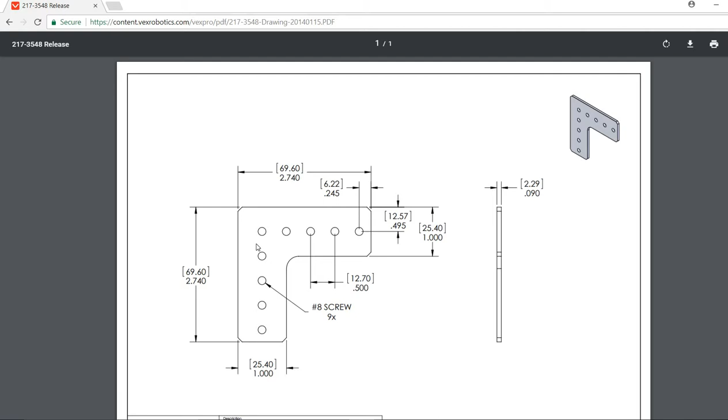I'm going to show you where you can find the robot part that we're going to build. If you go to VexPro's website, www.vexpro.com, go to VersaFrame, Gussets and Mounts, and if we scroll down and then go to the drawing page, we're going to do the 90-degree gusset. Click on this. What I suggest you do is print this page out or put it on a separate monitor, because that's what we're going to be building from.

I'm not going to be flipping back to it all the time, I'm just going to be using the dimensions. There's a few things I'll note: right now this just says number 8 screw, it doesn't really give a size for it. I'm going to use 5/32, I know that's about the size a number 8 screw would use. Also these chamfers, I believe those are going to be probably 1/8 of an inch, what I'll use on that, but it doesn't give a dimension directly on here. So that's what we're going to start from.

We're going to create this. I'll show you at the end of the video that you don't necessarily need to do it for this specific one, but you may want to make your own custom gussets, and going through this exercise will show you how you can do that. I chose this because there's a drawing out there, and it's a relatively simple part that you'll learn a lot from.

So I'm going to go to Creo, and we're going to start a new part. It is a part, and we will name it Gusset, and say OK.

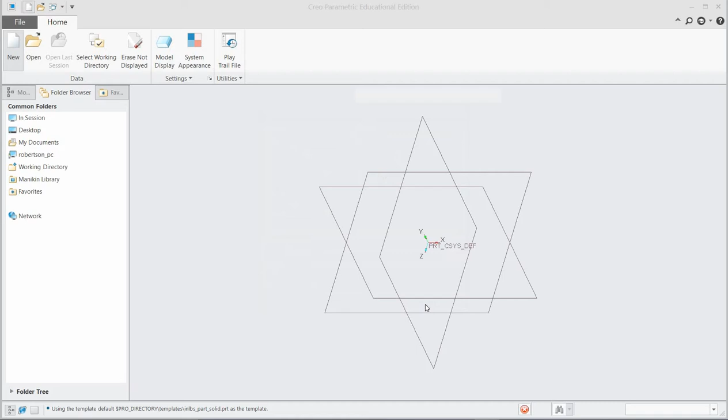So first thing we need to do is start just like we did the previous one. We'll do an extrude, we will select a plane to put it on, and then I'm going to choose to go to the sketch view.

When I like to sketch, if I'm doing a part that takes multiple lines to build, I like to sketch at least one line, and I usually start at the origin or somewhere that makes sense, and I will sketch one line. Right now it's trying to build another line on top of it, it just keeps trying to make a chain. But if you middle click, it just makes that one line.

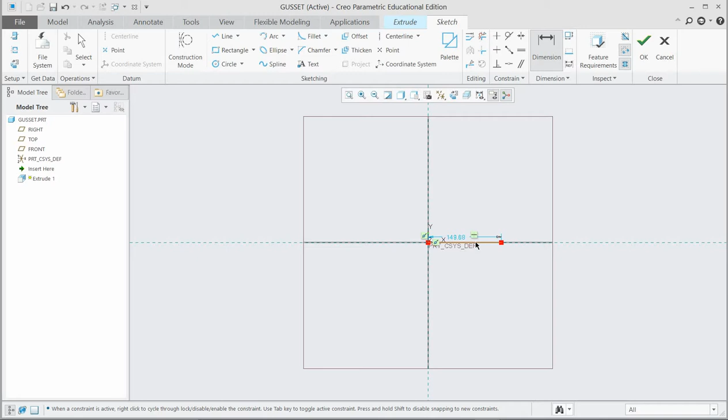I like to go ahead and just make one line and dimension it first. Same way you dimension, just click on it, then come away and middle click. Based on the drawing, this should be 2.740 inches.

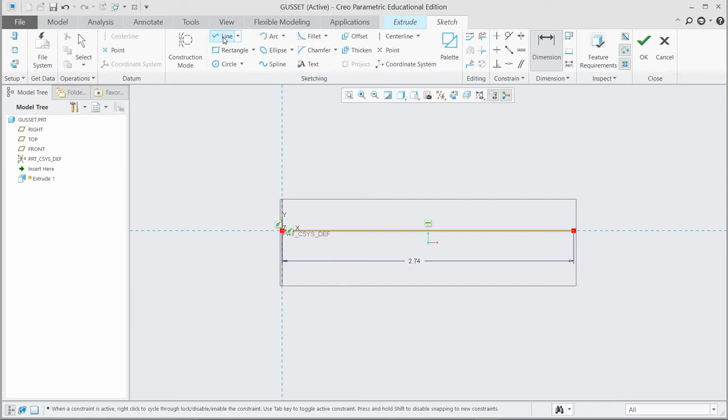After I build one line, the rest of the lines I can go ahead and finish sketching the whole part, relatively close to the size. It doesn't have to be perfect, but it does some neat things.

You'll notice right now this little green symbol says that line's horizontal. If I go off to an angle, it doesn't show it anymore, but if I come close, it tries to snap it, make it horizontal. Also, if I go slowly towards the end of that other line, it tries to make it where it'll connect. You can see the little blue dash line. So it'll help your sketching sometimes.

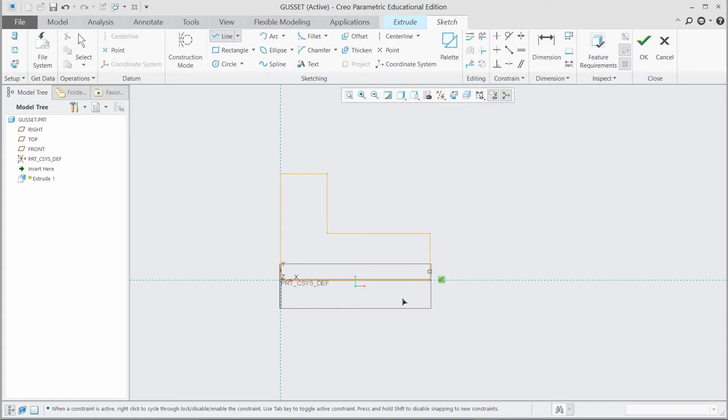Sometimes it'll mess you up a little bit, but I want to go ahead and do that, and then I'll close this sketch. It's still trying to draw, but if I middle click away, it will finish up my sketch. So now I've dimensioned this end here.

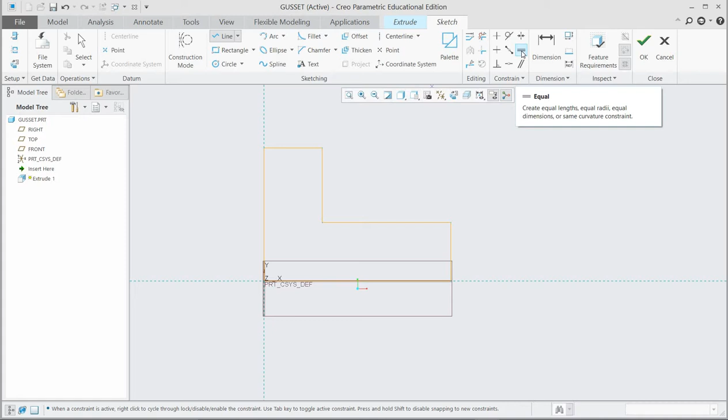I know what it is, but these other lines aren't dimensioned at the moment. But there's some neat things - I know I want this line and this line to be the same length. So what I can do is use this equals constraint right here. These are all different constraints that can be used, and we'll go through quite a few of them in these tutorials, but we'll go ahead and use the equal, where you click on this line. We want this line here to equal this line here. Alright, so it automatically used this 2.74 on this line there.

And there's a couple more that we want equal. We want this line... oh, hold on.

I tried to do too many at once because it's still trying to select those, so I'm going to undo and middle click away so it stops trying to make them all equal. Now I can hit equal again and make that line equal to that line.

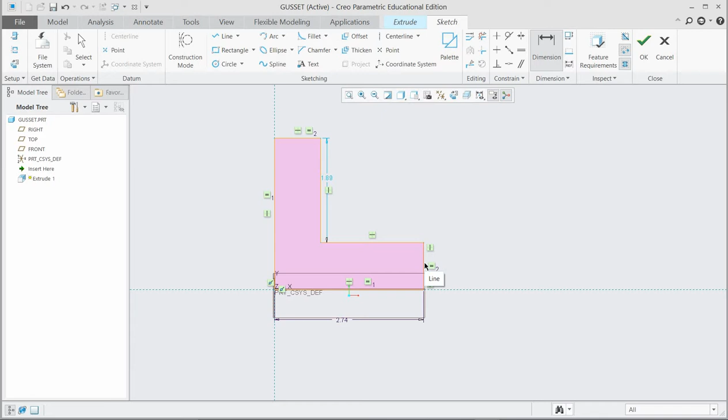Now, to completely lock the sketch down, it only needs one more dimension, but that dimension isn't given in our sketch. So we can put in another dimension, this one right here, which is given in our sketch as a 1-inch line. Now all of these dimensions are black, where before they were blue or green, showing the part wasn't completely constrained.

Now every dimension on this part is filled, and if we tried to put another dimension in here, it would give us an error saying it's over constrained, meaning there's too many things going on. So we'll just undo that—we didn't want to put that dimension in, I was just showing you.

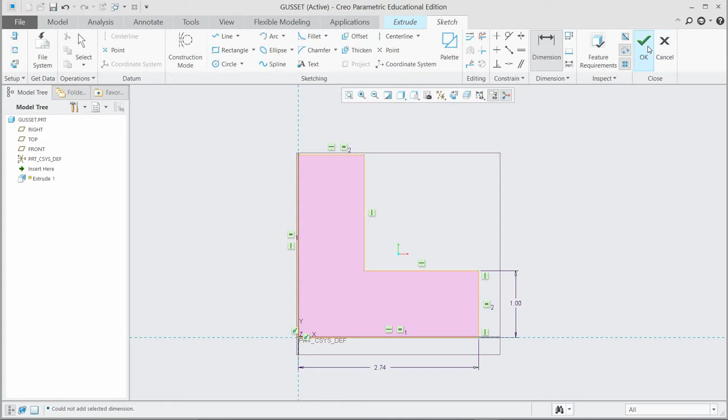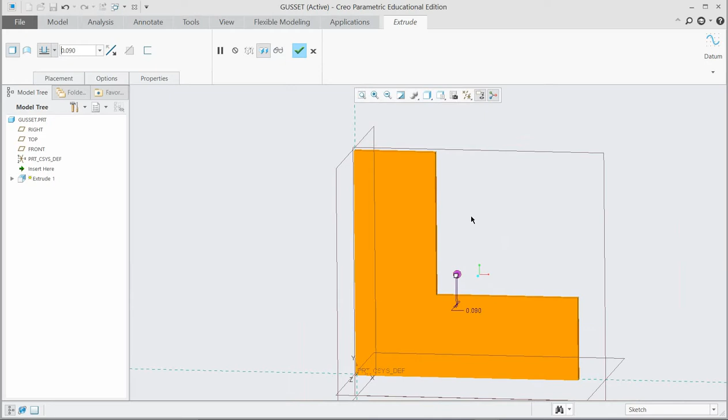So now we've got the basic L shape of our gusset, and if we hit OK, it's going to start extruding the part. If you middle click and drag it around to look at the 3D view, it's trying to pull it way out. But if we go up here and change the depth of the part to 90 thousandths, 0.090, it makes a thin part. And we can hit the check mark.

Alright, it's beginning to look a lot more like the part in the sketch.

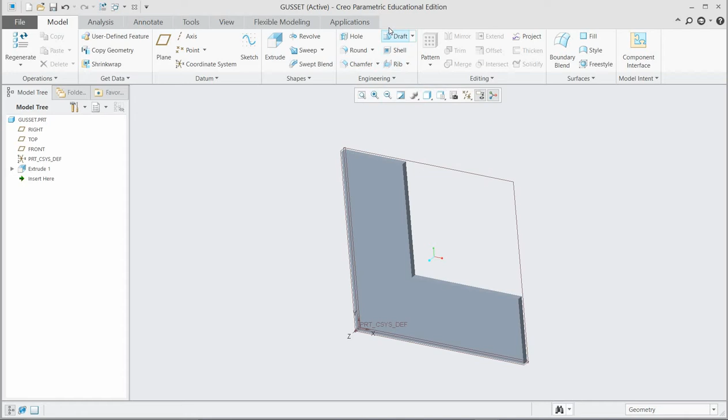So the next thing I'm going to do is add the holes. Holes are something we haven't worked with before, but these are the sub features right here that you can work with—there's this hole tool, and we'll use it.

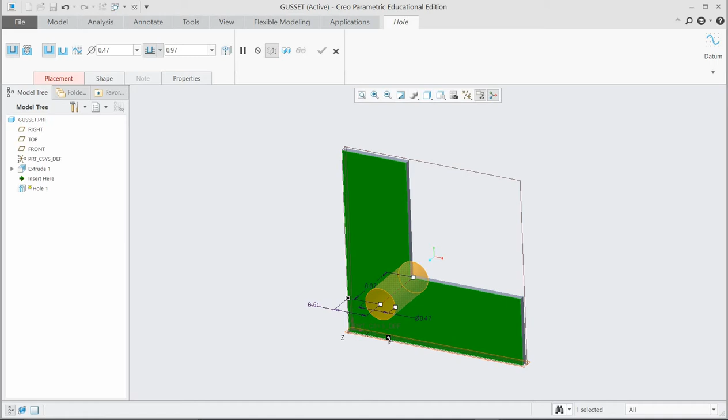We click on the hole, and it's asking where we want to put it. We want it on that surface, and you can see it's trying to show us about where the hole will be. We can use these green little tabs and drag one to this edge because we want to dimension it from that edge—from the bottom edge. Looking at the drawing, it places it right in the middle.

From this outer edge, it's saying it is 0.495. I really figured it would be right at a half inch, but it's showing it's not actually in the center, which is somewhat surprising to me, but that is what it is. So we'll use the dimensions they have on their drawing.

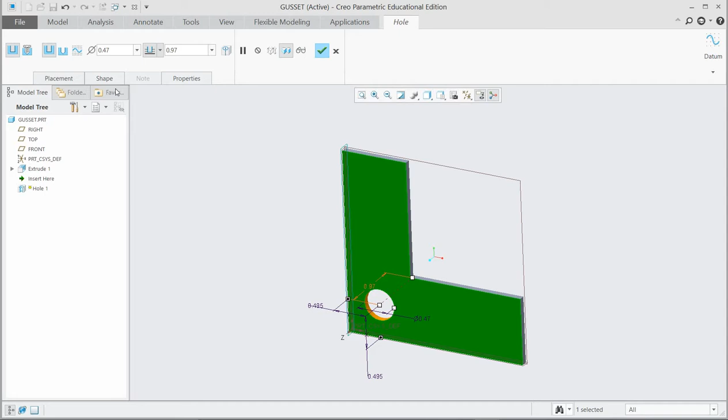Like I said earlier, the diameter is going to be 5/32, and you can go ahead and just type in a math equation. That's one of the neat things about this—you don't have to know it in decimal form.

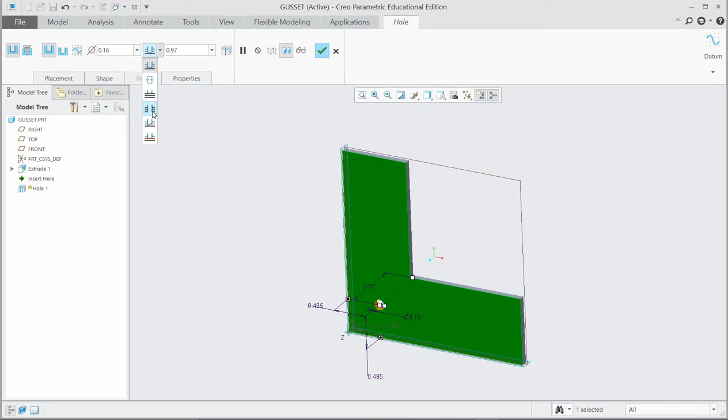And earlier when I talked about putting in the depth of an extrusion or a hole right here, you can also use this drop down to make it go all the way through a part, up to a surface, or other things. I'm going to go up to a surface, around to the back surface, and just let it go all the way to that surface. Then I'll hit check.

So I've made one hole, but if I want to make a pattern of holes, that's essentially what we have here. There's this pattern tool—you can click right there, or you can go to the hole and right click in the model tree, and there's a pattern feature there too. They both do the same thing, just different ways to get to it.

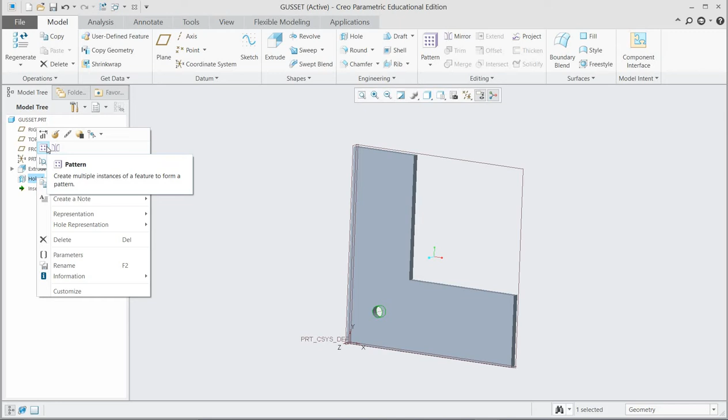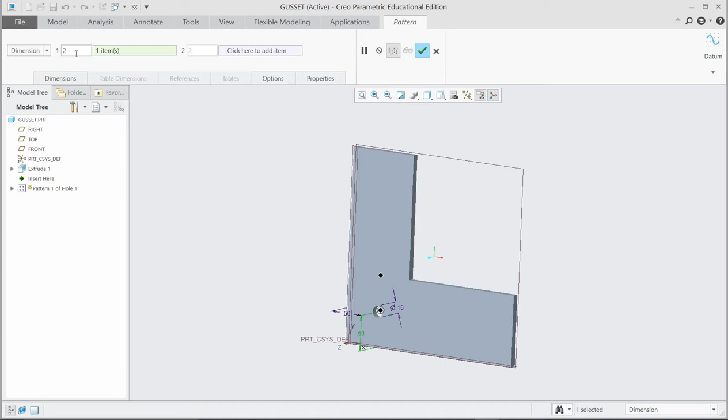Click on it, and now it asks what you want to pattern, or how you want to pattern it. If I click on this dimension here, I say I want to pattern that 0.5, but I want 1, 2, 3, 4, 5 of them, and I say okay—it puts 5 of them in there.

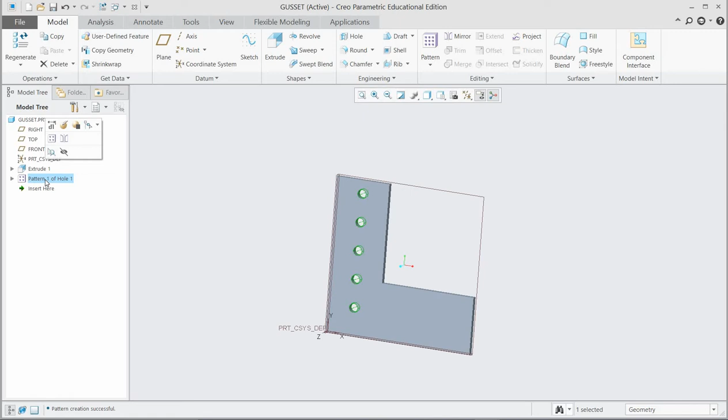Now let's say I want to pattern them going this way as well. What you can do, like I was talking about earlier, is edit the definition of this. We go to dimensions, then in direction 2, click here, add—it's at 0.5, and I want 5 of them.

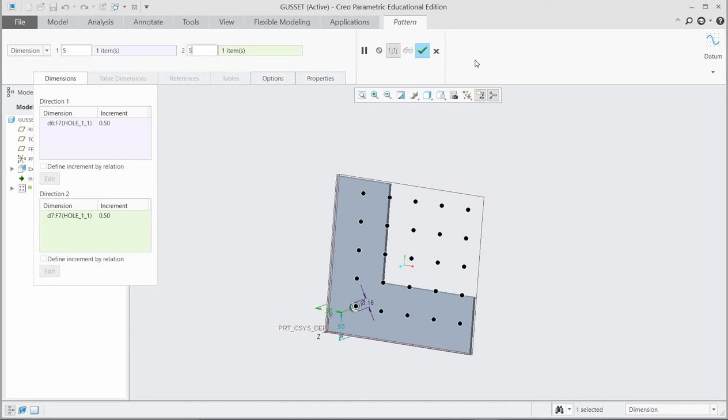You can see we're patterning it this way, but I want to show you what happens if I check this now. It's actually trying to completely fill up this pattern, but there's a way we can turn some of those off. If we go back to edit definition, you can see all these holes it's trying to pattern. If you click on the ones you don't want to actually pattern, they'll turn white. So just go and click them off, and it'll only do the ones that are left black.

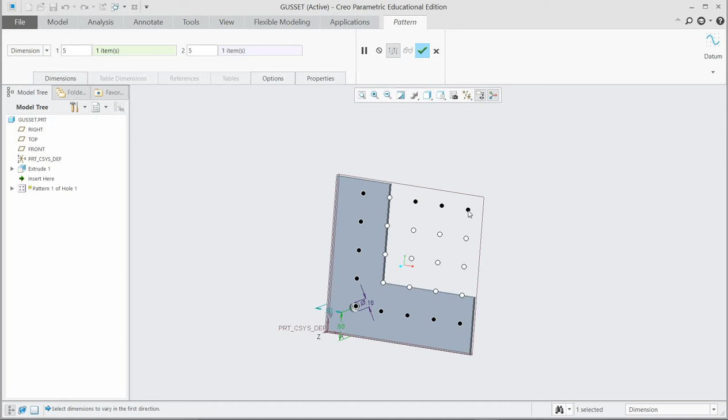So we're turning off features we don't want to go in through our pattern. Alright, so now we've got the whole pattern that we want. Basically the only features we don't have are the fillets on the edge and the chamfers.

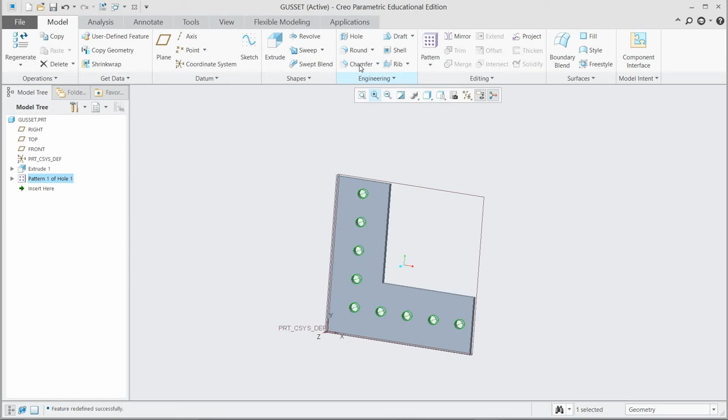What we can do is put a chamfer on this edge. So we click the subfeature chamfer, and then click the edges we want to add it. And I believe I said 1/8 of an inch. Well, that might be a little bit big compared to the drawing, but it doesn't really matter too much.

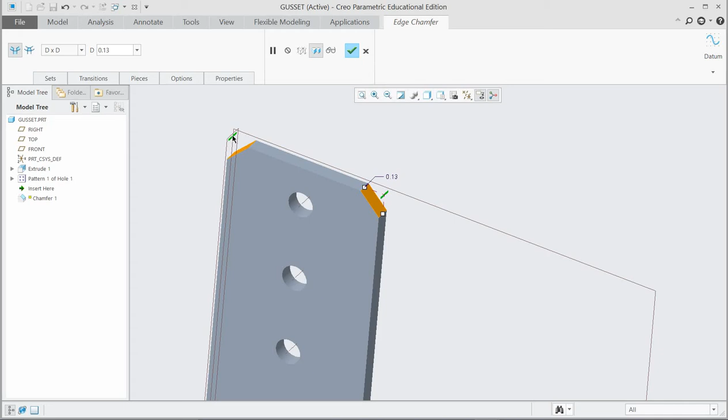We can go through and click each one of these, but if you hit Control, it'll basically take the dimension we have here and tie all these together. So I'm going to hold down the Control button and click this next edge, zoom out, go to all the edges that I want to do, hitting Control while I'm doing it.

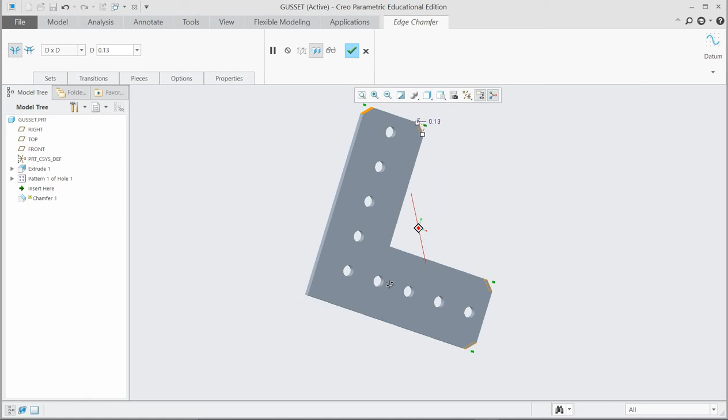You can see you can actually kind of click through an edge. If you just hover it over, it'll go onto it, but sometimes that's a little tricky, so you can actually rotate it till you can see the edge you want to click on. Okay, so those are the sides that we wanted chamfered. Click the check mark.

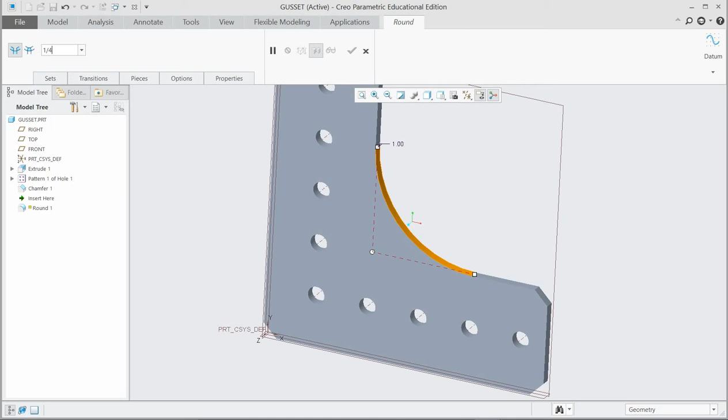So we're almost there. Basically we need our radius right in here to be like the part. So we're going to go to round, very similar to a chamfer. Click there - that's a big round that it puts in. I think it probably ought to be 1/4 inch or 1/2 inch. We'll start with 1/4 and say okay.

So right there, that looks pretty much like the gusset that is on the website. Just wanted to go quickly through it.

Now I'm going to show you a shortcut where you didn't necessarily have to do that on this particular part, because most of the parts that we can purchase are going to be online somewhere. But this is a good exercise, and a lot of times you want a gusset that may not be a 90-degree angle. You may want a certain angle specifically for a robot, and you can build your own gusset.

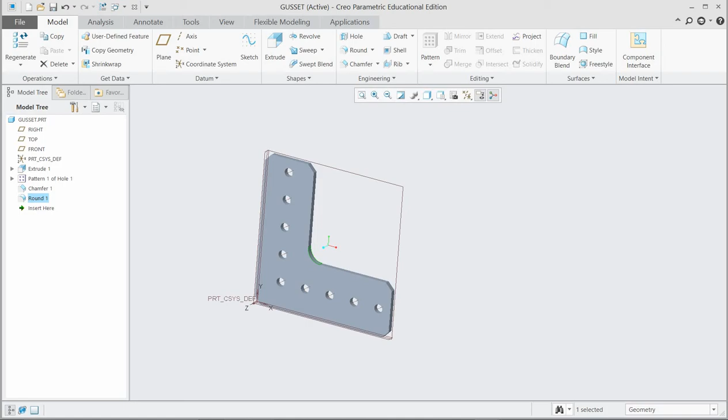But if you did want to build this gusset into a robot, you can actually go to Vex's website where we got this print. If you go back, they have a CAD file, and instead of doing the 90-degree, we'll do the 60-degree - just so you can, or actually, no, we'll do the 90-degree. We'll click on this step file, and it downloads it, and I will go show it in the folder.

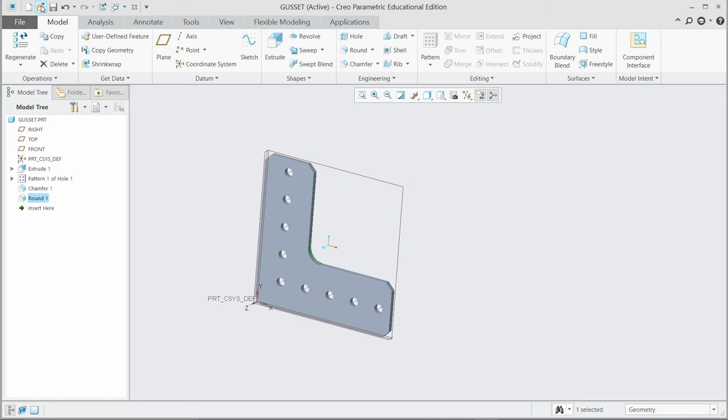Okay, and I'm going to actually move this to my desktop, to first Creo, just so I could find it, and I will open it in Creo and show you that it's pretty much exactly what we just drew.

So if I go to my desktop, first Creo, notice that it's not showing up right now because Creo's looking for its native files, and a lot of stuff you download on the internet will be maybe made in SolidWorks or another program, but they're usually saved in a step or an IGES or something common. But if we go to all files, we can see it now. Double click on it, say we want to open it as a part, say okay.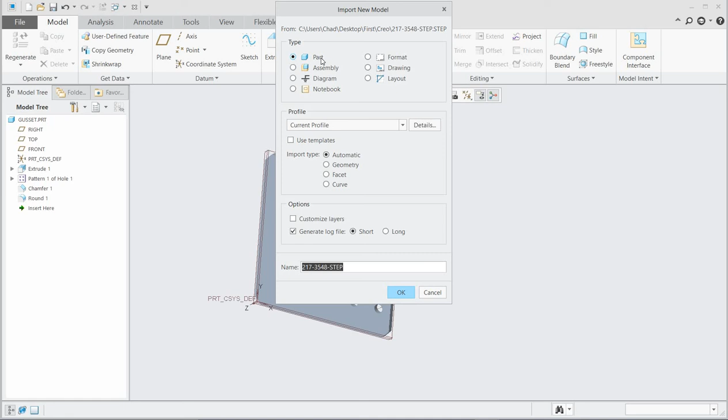Okay, so that is the part that we downloaded, and you can see it looks a lot like what we just made. Some interesting things - it doesn't have anything in the model tree that we can edit, so this part is just what they call a dumb solid. There's nothing we can really change on it.

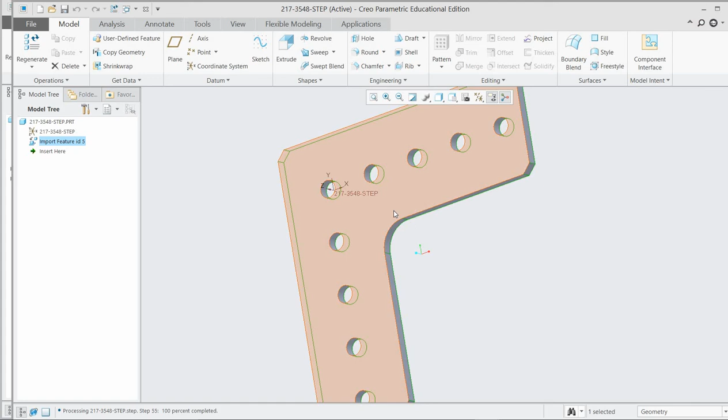What we can do is we can add new features. We could extrude, we could change some stuff, but we can't go back and change this hole size when we download things from the internet. But a lot of times we're just looking to get parts that we have.